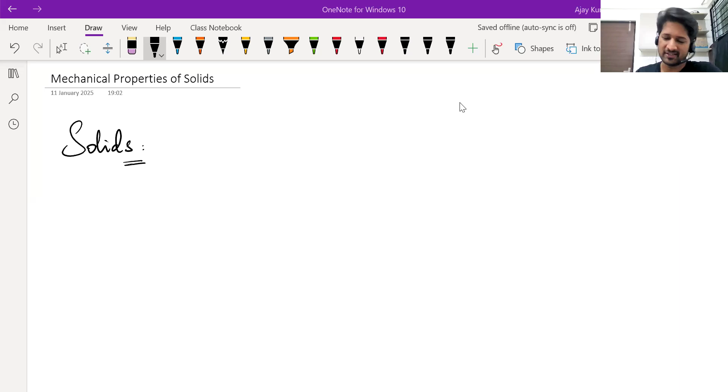So they have a fixed shape. Okay. Solids have a definite shape and size. Okay. Liquids and gases together are called fluids. They don't have a definite shape. They tend to take the shape of the container. Okay.

Now, the shape of a solid, is it not possible to change it at all? Is it possible to change the shape of a solid or not? Yes, sir. It is possible. Okay. All three of you come up with some examples where something is done to a solid to change its shape. I'll give you all 1 minute. Think carefully. You should describe a situation where some process changes the shape of a solid. Okay, I'll give you 1 minute.

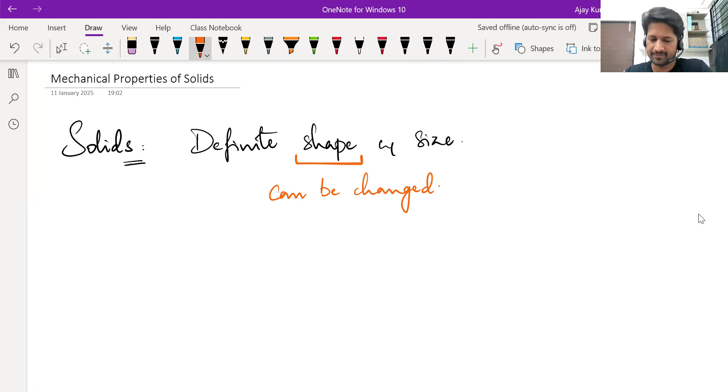Right. Rishi, describe one situation where some process changes the shape of a solid. Sir, plastic bottle or any normal bottle being crushed. Okay, crushing a water bottle. Fine, good. Vanilla? So a spring being compressed. Good, good. Aishwarya?

So sublimation of camphor. There, see, sublimation is a process where solid converts to gas or vapor. Okay, so it doesn't stay as a solid. Can you think of any other example? Object must stay as a solid, but its shape should change.

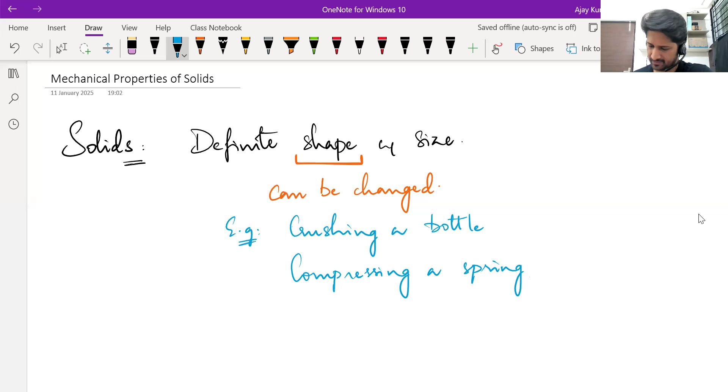So when you change the shape of clay, so clay dough. Okay, fine, fine. So, fine. We'll just take that as an example. Right, right. So it is possible to change the shape of a solid. Actually, wet clay or play dough, you can't call it solid. It's something called semi-solid. Okay, but yeah, that's fine. Maybe expanding a rubber band, stretching a rubber band. Okay.

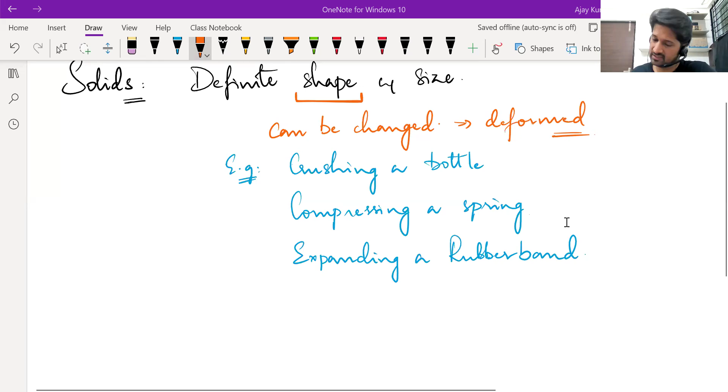So tell me, in order to change the shape of a solid, changing shape means what? Deforming. In order to deform a solid, what is necessary? Like in all these cases, what should you apply on the object to cause these changes? We should apply a force. Force is necessary, correct? So to deform a solid, force must be applied. Otherwise, the solid will maintain its shape. Okay, such materials are called solids. Okay.

Now imagine driving a nail into a wall, or hitting a nail into a wall. You all must have seen the process, no? The person holds the nail against the wall with one hand, in the other hand they have a hammer or a stone, and they strike it. And most probably the nail will cause some damage to the wall. Even if it doesn't penetrate completely in one strike, it will definitely leave a small dent, a small hole on the wall.

Now, without the nail and the hammer, if you punch the wall with the same force, will you be able to create that hole which the nail did? No, sir. Most probably not. Okay. So if you simply hit a wall with your bare hand, you won't be able to create a hole in the wall. But the same force, if you apply through a hammer on the nail, the nail is able to create a hole in the wall.

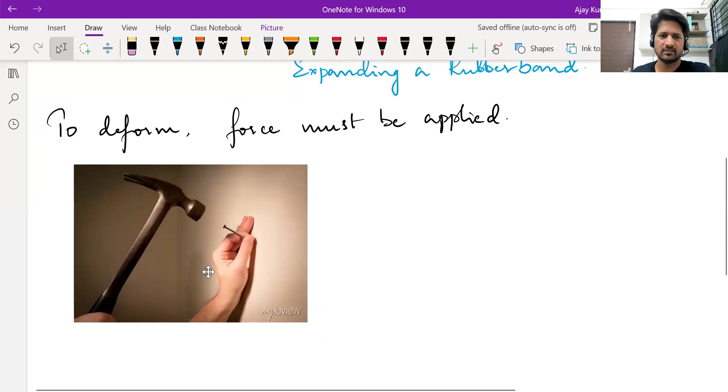What is the difference between striking the wall directly with your hand and placing a nail against it and then striking? In both cases, the force you are applying is the same. In one case, you are doing it through a hammer and nail. In another case, you are doing it directly with your hand. What's the difference? Sir, the amount of force at one single point. Okay, force at one single point.

Good, good. Properly speaking, it is the force that you apply per unit area that is different. If you punch the wall with your fist, the force will be distributed over whatever area of the wall your fist touches. But when you hit a nail with the same force, the nail's tip is very narrow. So the force gets transmitted to the wall over that small area, and that is able to deform the wall.

Okay, see, when you directly punch it also, at the molecular or atomic level, some disturbance will be there, but you won't be able to notice it. But when you hit the wall through the nail, you will be able to notice a deformation or a damage caused. It causes more damage. Fine. So to deform a solid, a force must be applied.

But the deformation that actually happens does not depend only on the force. Deformation depends on force per unit area, how much force is acting per unit area. You must have come across many examples of this. Like, when you simply stand on the floor, your feet won't hurt. But when you stand on something sharp, or when you accidentally step on a nail or a thorn, it will hurt. In both cases, it is your weight only.

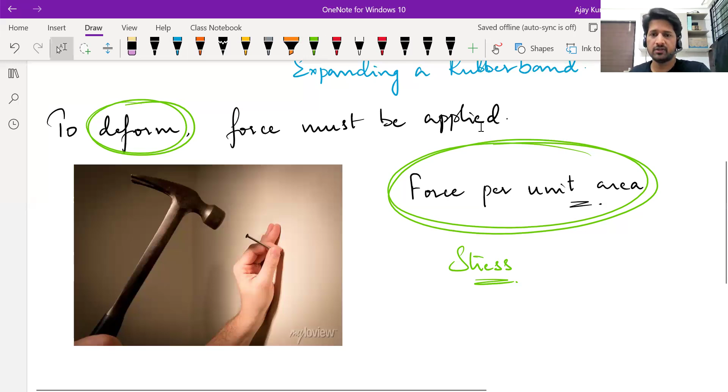So stress by definition is force per unit area. Now based on how you apply the force, there are different kinds of stress. We'll discuss those. But first of all, derive the SI unit and dimensional formula of stress, all of you. I'll give you 2 minutes. Yeah, Pawan, what is the SI unit of stress? Newton meter inverse square, sir. Force per unit area. Force is in newtons, area is in meter square. So newton per meter square.

Fine. Dimensional formula: newton is MLT^-2, divided by meter square, L^2. So M L^-1 T^-2. Newton per meter square is sometimes also written as pascal, but pascal is more commonly used for pressure. Stress and pressure are quite similar; there is a slight difference between them. Pressure is one particular case of stress actually. So pascal is more commonly used for pressure, but technically it's the same as newton per meter square. So stress can also be expressed in pascals.

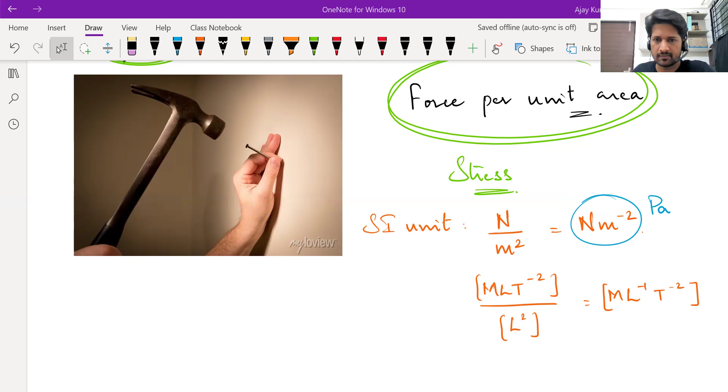So as I said, depending on the kind of stress you apply, there are different kinds of deformation you can produce in the object. These are the cases that you need to learn. In the first case, case A, a force is applied at the ends of a cylindrical wire, or a cylinder itself. When you apply a stretching force at the ends of a cylindrical wire, the length will elongate, increase a little bit.

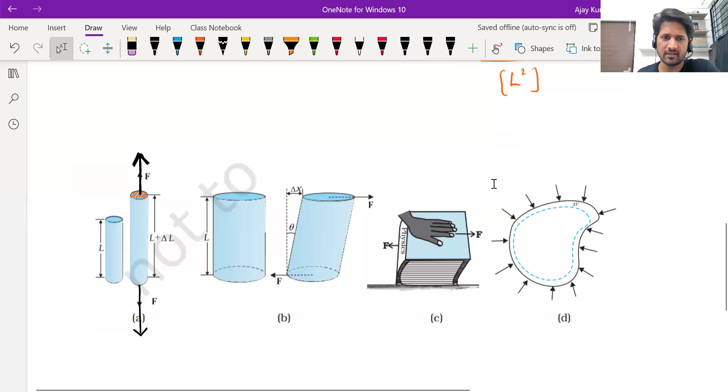So applying a force that way, which way? The force is applied perpendicular to the area of cross section. Applying a force that way creates one kind of stress on that object, and based on the stress there is a kind of deformation it produces. Here the cylinder is getting elongated, length is increasing. Of course, when length increases, the cross sectional area will decrease a little bit, but for small elongations that change can be ignored. We'll discuss all that while solving problems. Next case is also a proper cylinder with a wide area of cross section, and they are applying a force parallel to the area of cross section.

Okay, and it is producing a different kind of deformation, as you can see. Second case and third case are similar. In the third case also, what they are doing is on a fat textbook, they are applying a force parallel to the cover of the book this way, and it causes certain deformation.

Okay, what do you call this? What is this part of a book called? The part where all the pages are stuck. Find out. Okay, so basically that is getting deformed.

So B and C are like one case where force is being applied parallel to the area of cross section, and it causes a particular kind of deformation. Then the last case, if you see, forces are being applied at every point on the surface of an object, and they are being applied perpendicular to the surface. Okay, in that case, what happens?

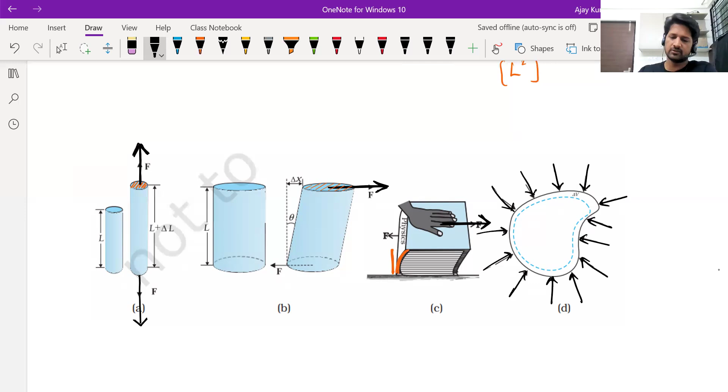So, the first case where the force is applied perpendicular to the area of cross section results in elongation of that cylinder. If the force was applied inwards, it would have resulted in a compression of the cylinder. So this kind of stress is called longitudinal stress.

The stress which tends to elongate or compress an object is called longitudinal stress. And to do that, to elongate or compress an object, you need to apply a force perpendicular to the area of cross section. Next case, B and C, we apply force parallel to the area of cross section.

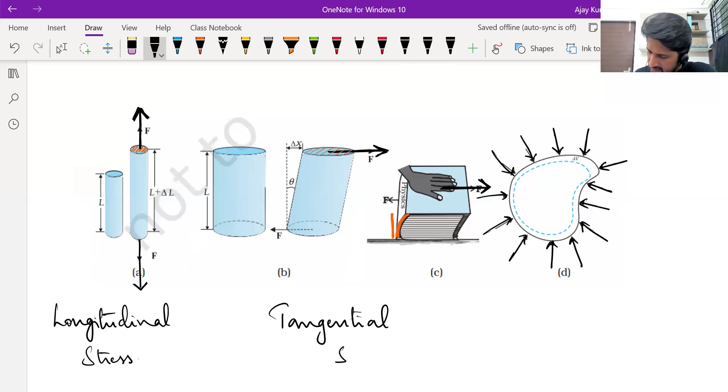That kind of stress is called tangential stress - tangential force, tangential stress. Third case, where forces act at every point on the surface and they tend to compress the object, or they can even expand the object - in that case, the stress is called bulk stress or volumetric stress.

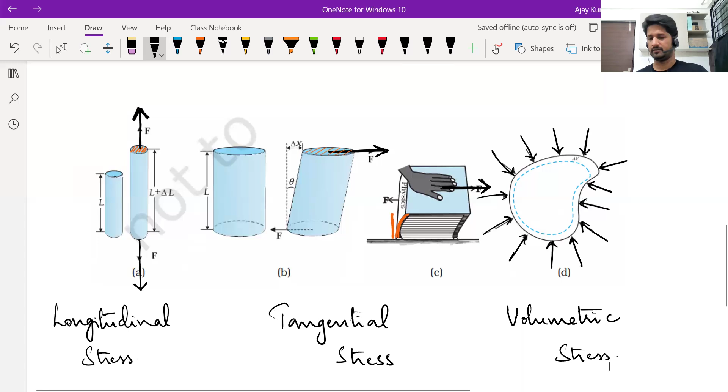Now you all think of some solid materials. There are a lot of materials which you can call solids. Each one of you come up with some examples. Think of one solid material which is very hard to deform, and think of one solid material which is very easy to deform. Okay, I want answers from all of you. Type in chat, I'll give you 2 minutes. One material which is considered a solid and is very hard to deform, one material which is considered a solid and is relatively easier to deform. Each one of you give examples for this.

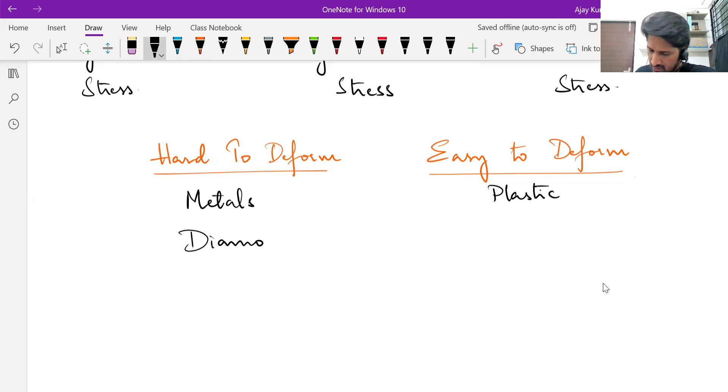Okay, for examples of solids which are hard to deform, I got one answer as metals as opposed to plastic - metal bottle, plastic bottle. Then I got two answers as diamond. Good, diamond is the hardest material known to us. And on the other side - rubber, paper, sponge, steel. Fine, steel comes under metals. Good, so there are some materials which are easy to deform and there are some materials which are hard to deform.

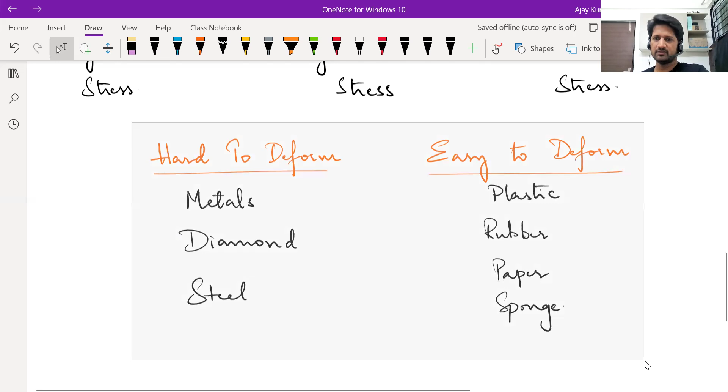Basically, what happens is when you apply a deforming stress or a deforming force, due to intermolecular forces - intermolecular forces can be attractive, they can be repulsive also - if you want to discuss in depth, you must have heard of something called bond length, in chemistry, chemical bonding.

So that's the mean distance between two atoms in a bond. If atoms come closer than that distance, the force between them becomes repulsive - it will send them away. And if atoms go slightly farther than that distance, the force brings them together. The same thing happens with intermolecular forces also.

So suppose there is a solid object and you try to compress it - for example, this pen itself. If I try to compress it this way, the force I am applying is inwards, but the pen does not compress, there's no visible compression. I'm not able to notice any compression here. So basically what happens, the moment we apply a force, internal forces between the molecules will start opposing - those forces are called restoring forces. They restore the shape of the solid, or they maintain the shape of the solid.

These are very important. Now, if you try to compress an object - compression means you will be applying a force inwards - then the restoring forces will be outwards. If you try to elongate an object, if I try to stretch this pen, I'm not able to notice any visible stretch in it. Maybe if you stretch a rubber band, yes, the stretching will be visible.

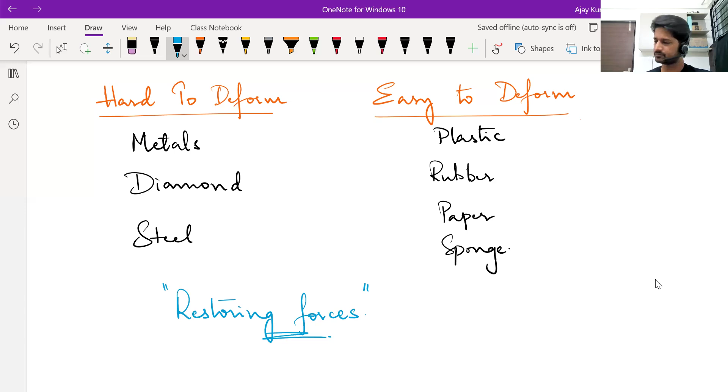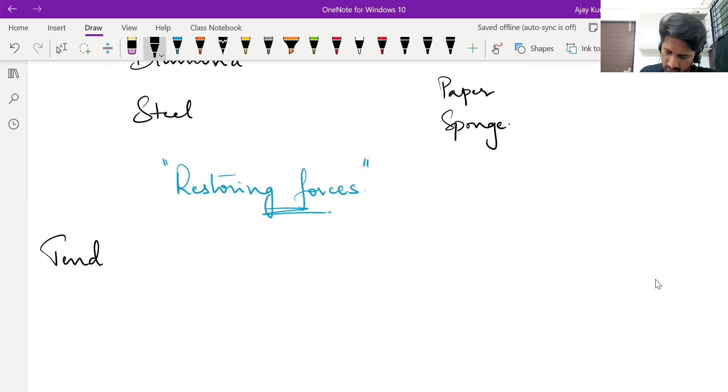Now tell me, the tendency of a material to maintain its shape, or to oppose a deforming force, what is it called? Sir, elasticity. Correct, elasticity is the tendency of a material to oppose a change in shape. We had discussed this earlier in types of collisions, work, energy and power.

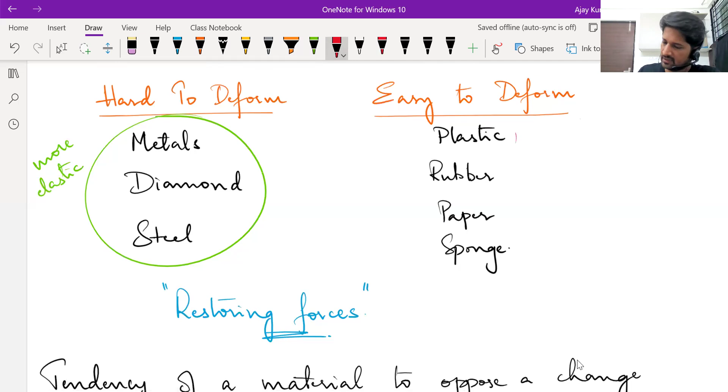We even discussed whether steel is more elastic or rubber is more elastic. Materials which are harder to deform are more elastic, they have a greater tendency to maintain their original shape. Materials that are easier to deform are less elastic.

The opposite of elasticity is plasticity. Some materials have no tendency to regain their original shape at all after deformation, and you can very easily deform them. Such materials are called plastic. I'm not talking about the substance called plastic in daily life, but about this property of materials. If materials are very easy to deform, they are said to be plastic. So elastic is the opposite of plastic.

Based on the kind of stress you apply, a certain kind of deformation is produced. Deformation is measured in terms of strain, or you can say strain is a measure of the deformation produced in the object. There are different kinds of stresses and different kinds of deformations, so there are different kinds of strains as well. For each kind of stress, there is a corresponding kind of strain.

How is strain calculated? Stress is force per unit area. Strain is basically the relative change in dimensions of the object. When we discuss the formula, you'll understand better. So strain is a relative change in shape—how much has it deformed compared to the original shape. That is what strain is.

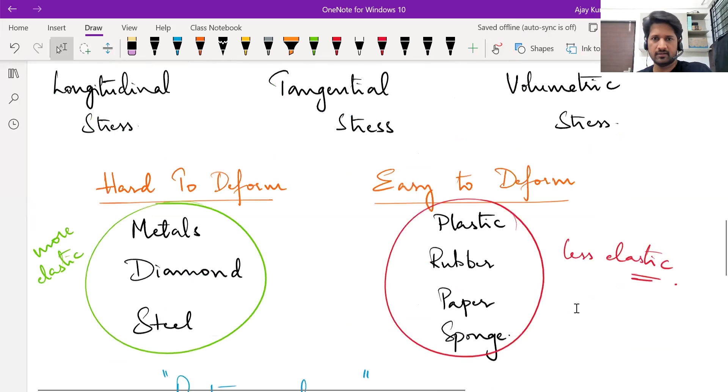Now, greater the stress you apply, greater the strain that gets produced. From everyday experience, we can tell this—greater the deforming stress, greater the strain you can produce. So up to a certain extent, for materials, the strain produced will be proportional to stress. It's not always directly proportional, but up to a certain extent there will be a proportionality.

So let us assume the strain produced is directly proportional to the stress applied. This is not always true—there are a lot of cases where the proportionality will not hold. But for now, we will consider only this case where strain is proportional to stress. If that happens, how to calculate strain in different cases is what we'll learn. So assume strain is proportional to stress—strain means deformation, stress is the deforming force.

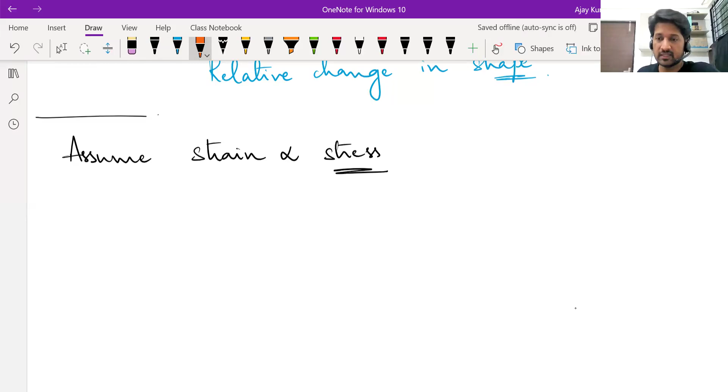The proportionality constant between stress and the corresponding kind of strain is called modulus of elasticity. Now there are different kinds of stresses and different kinds of strains, different types of deformation that you can produce. For each kind of stress-strain pair, there is a modulus of elasticity defined.

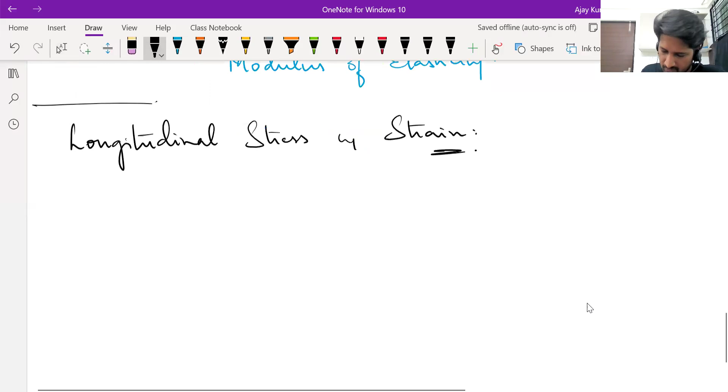Let us first discuss longitudinal stress and longitudinal strain in detail. We already discussed that longitudinal stress is the perpendicular force applied per unit area—you call it longitudinal stress when force is applied perpendicular to the area of cross section. So how do you calculate longitudinal stress? It's the perpendicular force acting per unit area on a cross section. You will be given which cross section to calculate the stress on. You see the forces acting on that cross sectional area, identify which forces act perpendicular to it, and divide force by area to get the longitudinal stress.

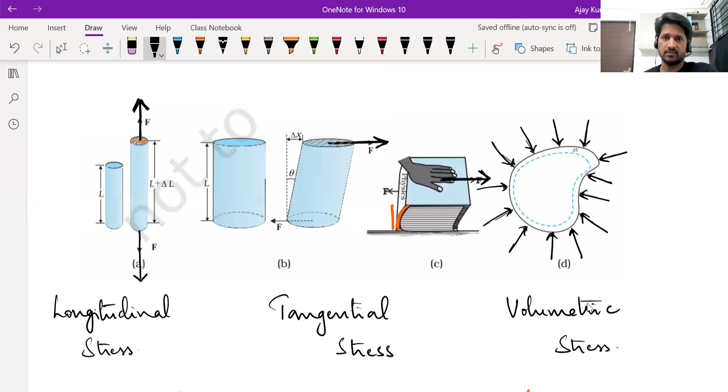When you apply longitudinal stress, what happens to the object? The object will either get elongated or compressed—the length will change. If it gets elongated, you are applying a stretching force, creating tension. So in longitudinal stress, there are two types: if you are trying to stretch the object, it is called tensile stress; if you are trying to compress the object, it's called compressive stress.

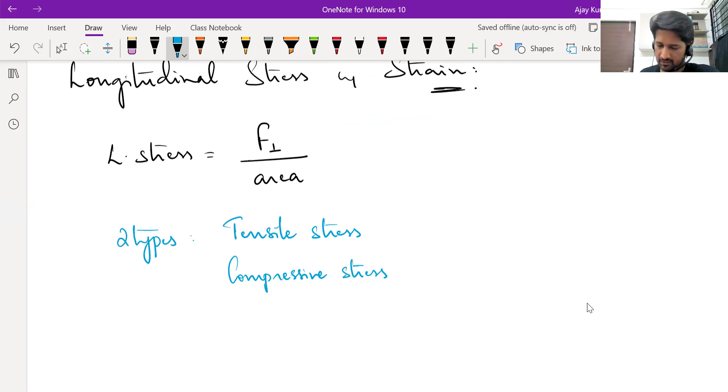Both are examples of longitudinal stress itself. And in both cases, what will happen? The length changes. In one case, the length increases, in another case, the length decreases. So that's longitudinal strain.

As I said, strain is a measure of deformation, the relative change in shape. Longitudinal strain is calculated as change in length divided by the natural length, which we call L naught. Natural length means whatever is the length of the material before the stress is applied, that is, when there is no stress.

Longitudinal stress is the perpendicular force acting per unit area of cross section, and the corresponding strain produced is calculated as delta L by L naught, change in length divided by the original length. Change in length is in meters, SI unit, and original length is also in meters, SI unit, so change in length by original length will not have any units or dimensions.

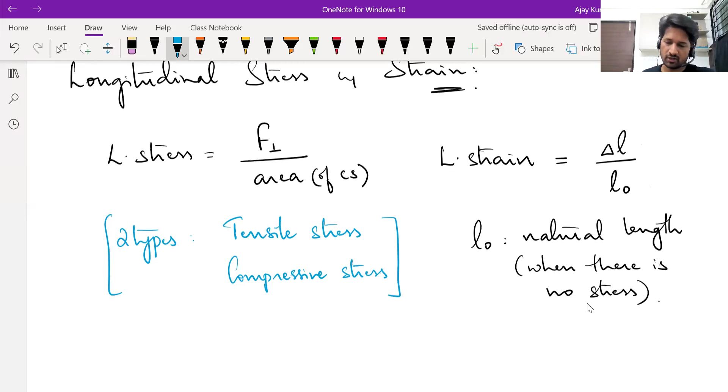Not just longitudinal strain, any kind of strain, since it's just a relative change, is dimensionless. As a physical quantity, it has no units, no dimensions. Okay, let's solve problems based on this.

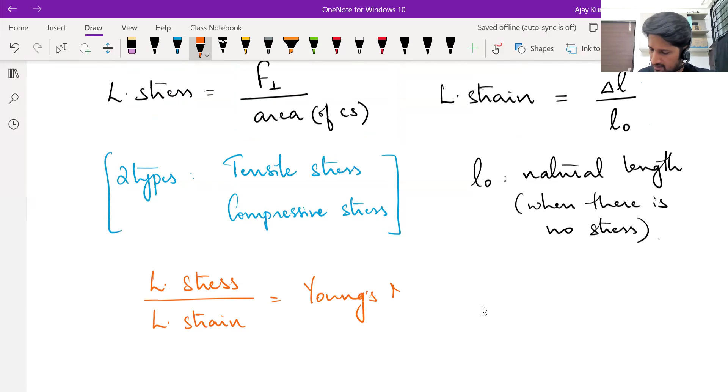We just discussed that strain will be proportional to stress up to a certain extent. The proportionality constant between longitudinal stress and longitudinal strain is called Young's modulus of that material. Young is the name of a scientist, and this proportionality constant is named after him. It varies from material to material.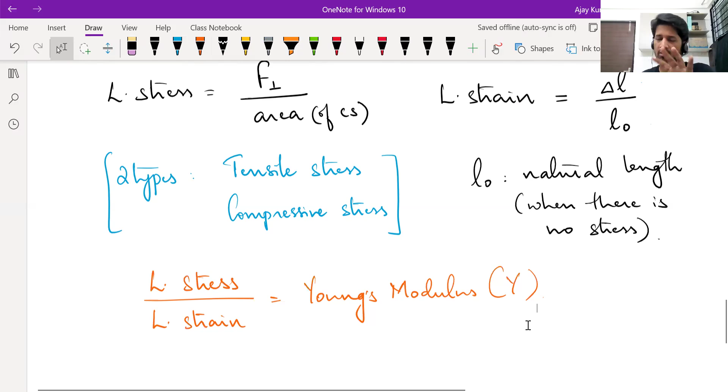Not all materials have the same Young's modulus. Some materials are easy to deform, some are hard to deform. So for the same stress that you apply, the strain produced will vary from material to material, and even in the same material, from object to object. For example, applying a stretching force on a single rubber band versus a bundle of rubber bands produces different amounts of elongation.

So Young's modulus is not the same for all materials, but for a particular material, it will be the same. We'll solve problems, and you'll understand.

Now, stress has unit Newton per meter square. Strain does not have any unit. Therefore, Young's modulus in SI units will also be Newton per meter square itself. Whatever is the unit of stress, the same will be the unit of modulus of elasticity.

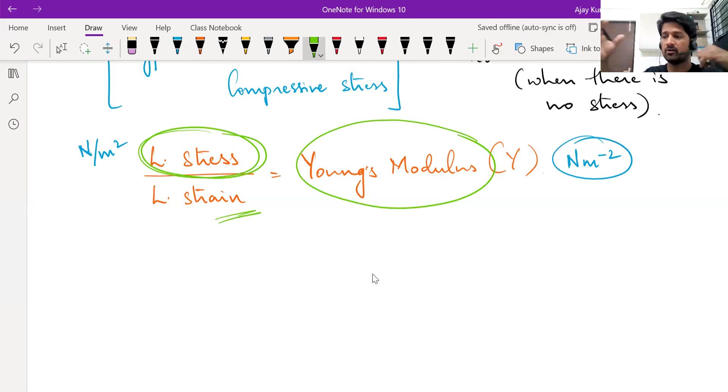I am stressing on units because questions based on units and dimensions from this chapter are very common. So if you know the Young's modulus of a material and how much stress is applied on it, you can tell how much strain gets produced, meaning by what extent it will elongate or get compressed. Or if you know any two of these terms, you can find the third one.

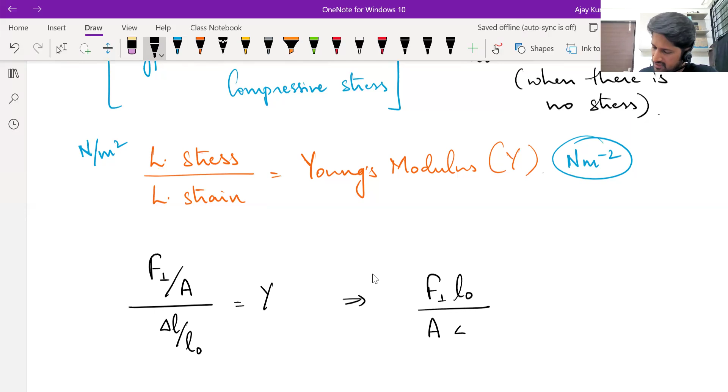Now, longitudinal stress is perpendicular force per unit area, and longitudinal strain is change in length divided by natural length, and stress divided by strain should be equal to Young's modulus. So perpendicular force multiplied with natural length, divided by area of cross section multiplied with change in length, becomes Young's modulus. Just remember it as stress by strain.

Usually we'll be interested in deriving the elongation. From this formula, you can say elongation delta L is equal to F perpendicular times L naught, divided by A times Y. For convenience, we write it as FL by AY. We'll apply this formula, and most of this chapter is based on longitudinal stress itself. Note down these formulas, all of you.

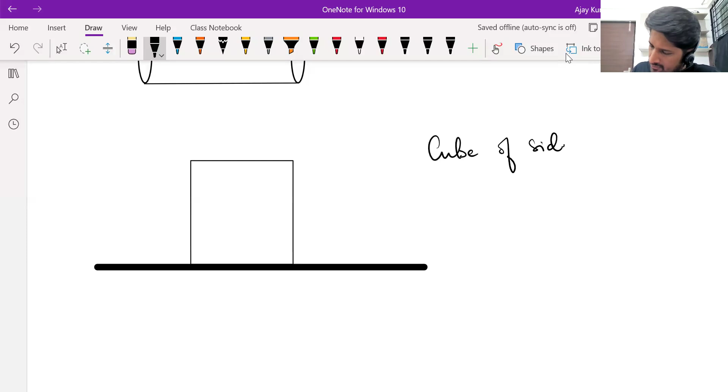Consider a cube of side A and total mass m placed on a horizontal surface. It's in equilibrium.

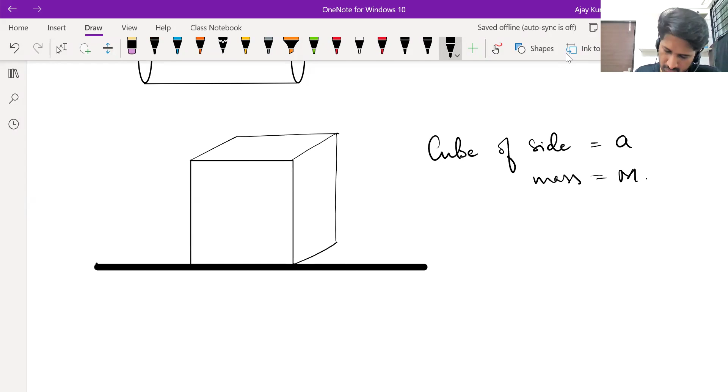Calculate the longitudinal stress. First case, on its base. Next, on its cross section, which is at a height of A by 2 above the base.

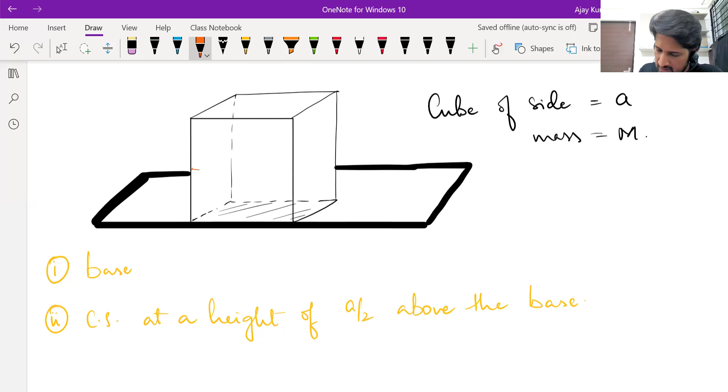It's important to visualize the cross sections first. The base is this. So you have to find out how much longitudinal stress acts on the base, and then the other cross section I am referring to is this, which is at a height of A by 2 above the base.

Longitudinal stress, by definition, is perpendicular force per unit area. Think about what force acts perpendicular to that area of cross section, how much it is, then divide force by area to get the stress. Do this, all of you: derive the longitudinal stress on the base and on the cross section which is at a height of A by 2 above the base.

Let's discuss. Rishi, tell me first, if you want to find out stress on the base, what forces act on the base of the cube? So mg and normal. Mg, does it act on the base of the cube? Why are the other particles of the cube weightless? Mg acts everywhere, okay? Fine.

Now, if only gravity had acted on it, had it been in free fall, it would not have gotten deformed. But because of the normal force acting on the base from outside, there is deformation. So the force acting on the base, which causes stress on it, is the normal force. Fine. Like you can experience this in real life also.

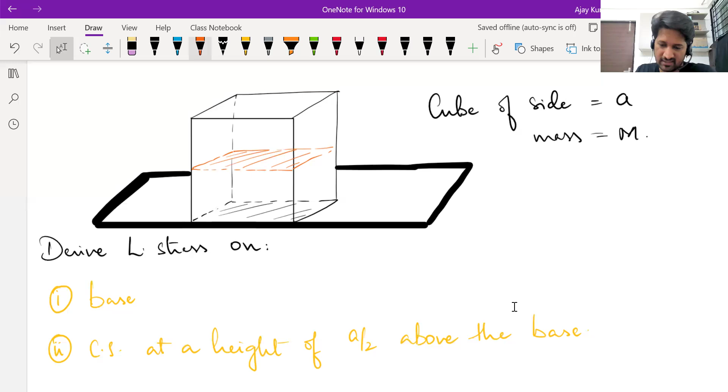Like suppose your hand is free like this, there is no stress on it. But when you push it against a wall, there will be stress on it. So it's the normal force which causes stress. And normal force acts everywhere on the base, it acts over that entire area.

Okay, Rishi, how much is the area of the base? Area of the base of a cube. A square, it's a square. Okay. And how much is the normal force that acts on it? The force acting perpendicular to the base, how much is it?

You said M, weight, sir. Can you repeat? M is mass. How can mass be a force? Mg. Okay, in this case, the block is in equilibrium, so normal force balances the weight of the block. So perpendicular force acting is mg, area is a square. So the longitudinal stress on the base will be mg by a square.

Next, Pawan. We are considering another cross section which exactly divides the cube into two halves, two equal halves. It is at a height of a by 2 from the base. Pawan, can you tell me how much stress acts on that? Not stress, how much perpendicular force acts on this cross section? Perpendicular force means normal force. How much normal force acts on that cross section?

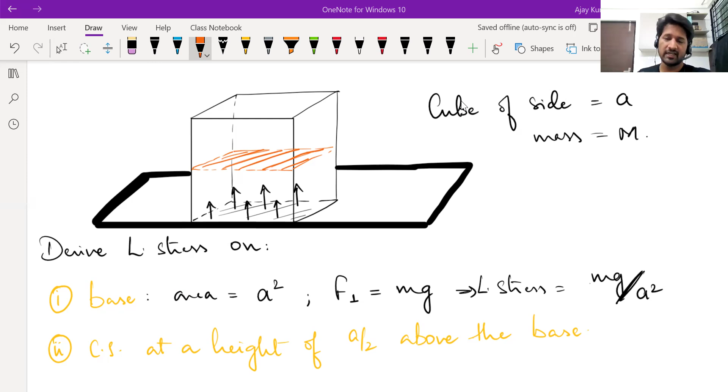Sir, mg by 2. Mg by 2, correct. The normal force at that level balances the weight which is above it. And since that cross section cuts the cube into two equal halves, the weight above it is mg by 2, so the normal force at that level will be mg by 2. And it's acting on the same area, no? It's a cube. When you cut it horizontally, the area you get will still be a square of area A square. So the stress at that level becomes force mg by 2 divided by area A square, so mg by 2A square.

Fine, hope this is clear to all of you. If you have any questions, you can ask. Next.

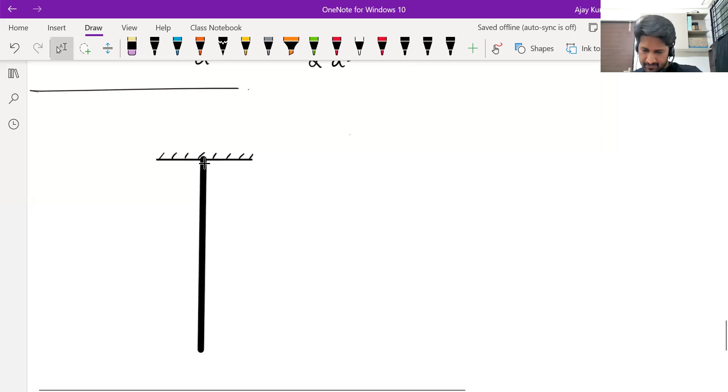Suppose there is a wire suspended from a ceiling roof. It's a heavy wire, not a massless string. Think of it as a thick and heavy metal wire. Assume its mass, total mass is capital M. Cross-sectional area, CSA stands for cross-sectional area, let's say it is A. And total length is L.

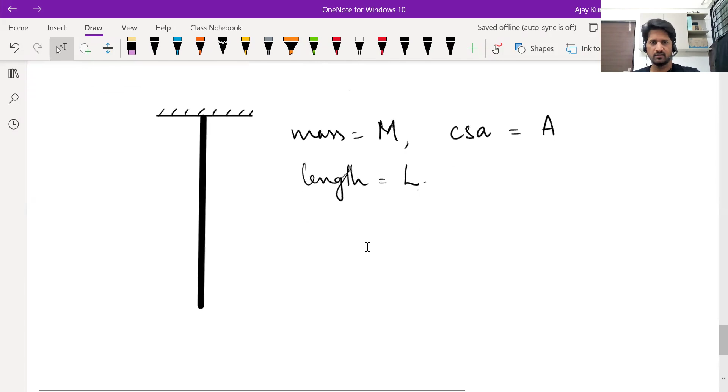Fine, do you think there will be stress in this wire or not? Like imagine yourself doing pull-ups, okay, or holding a bar and hanging from it. You all must have tried it in parks, play areas, or in gyms. Do you feel stress on your body when you stretch yourself like that or not? Or when you hang holding a bar, will you feel stress or not?

Yes, sir. Okay, where do you feel the most stress? Suppose you are holding a pull-up bar, okay, and you suspend yourself from it. Where do you feel the most stress? Arms, obviously, on your palm itself the stress will be highest. And I don't know if you actually checked it or not, but as you go lower, the stress decreases. And on your feet, there won't be any stress in that case.

When you are simply standing on the ground, on your feet, the stress will be the highest. Like in the case of this cube, the stress on the base was mg by A square, but at this level, the stress was only mg by 2A square. Same happens with our body also. When you are simply standing on the ground, maximum stress will be on your feet and the bones in your legs. Higher up or on the upper parts of your body, there will be lesser stress. But when you hang yourself or suspend yourself from a pull-up bar, then the stress will be more on the upper parts of your body than the lower parts.

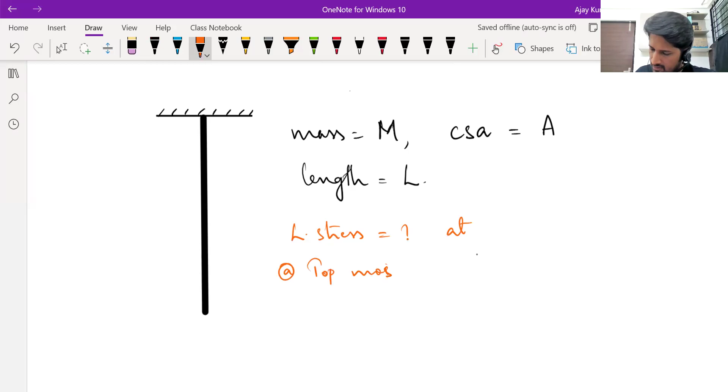Now, the same thing should be happening with this wire as well. So I want you all to find out how much is the stress. Okay, calculate longitudinal stress at A, the topmost point. Now, I call it the topmost point, but actually there is a small cross section there. When we say topmost point, we are referring to that small area of cross section.

Calculate the longitudinal stress there and calculate longitudinal stress at the midpoint of the wire. When we say midpoint, we mean the cross section which is exactly at half of the wire. And then the bottommost point of the wire. Try this, all of you.

Total mass of the wire is given M. Total length is given L. And you are given three different positions where you are required to find out the stress. Okay, I'll give you all 2 minutes. Type answers to all three parts together.

Okay, first of all, tell me which force causes stress in this case? To calculate stress, you need the magnitude of a force acting perpendicular to an area of cross section. Now, cross sectional area of the wire is easy to visualize. The wire can be thought of as a cylinder. It could have been any shape actually, but you can take it as a cylinder. Then the cross section will be in the form of a circle like this.

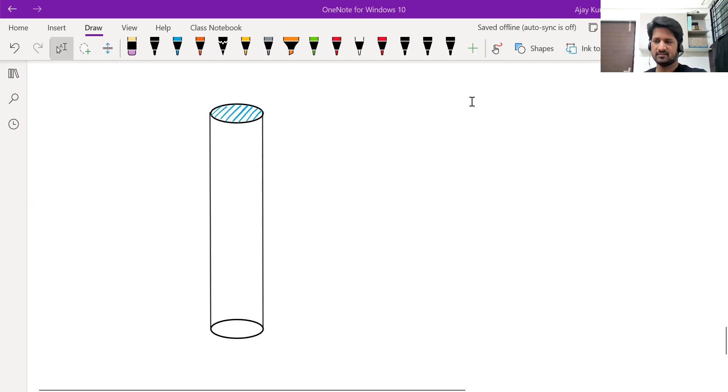So at the topmost point where it is attached to the ceiling, this is the area of cross section. But what is the force acting on it? Name of the force. Does this wire have a tendency to get stretched or compressed? It's stretched. And you can stretch an object by applying tension on it. So the force that you need to consider is the tension, which acts everywhere on the area of cross section. So where the wire is attached to the ceiling, there will be a tension acting on that cross section.

Now the area of cross section is given to you as A. At the topmost point, how much is the tension is what you need to know. If you know that, then that tension divided by area of cross section gives you the stress. Vanilla, you have given one answer, mg by A. Why do you say tension there is mg? How can you say that the tension there is mg? On what basis?

So the mass below the topmost point is m. Fine, good. See, the tension there has to support the entire weight of the wire, has to prevent the wire from falling down, right? So tension there has to balance mg. Therefore, the longitudinal stress at that topmost point, tension divided by area, simply becomes mg by A.

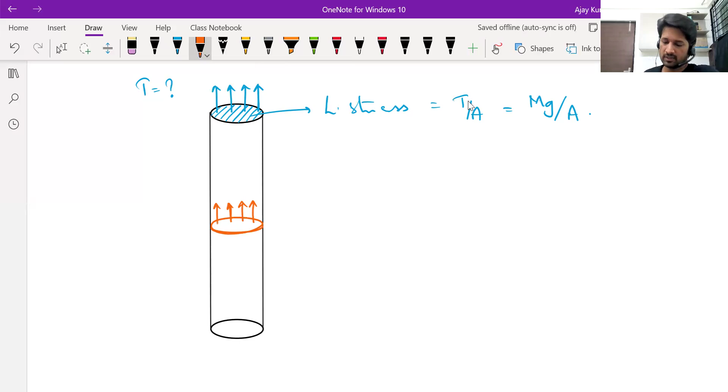Next, you are asked to calculate stress at the midpoint of the wire. Imagine the cross section at the midpoint. Basically, this wire is suspended under gravity. So what will happen? The lower part of the wire will be supported by the upper part this way. The upper part will exert a force on the lower part like this. The lower part will also be pulling the upper part down. There will be force acting like this also on that cross section. You have to take force only on one side, not both sides.

For example, if you consider this pen, I'm sure you all are able to see a red band here. So you can think of it as a cross section. There is some part of the pen to the right side of the cross section, some part to the left side. Now, if I try to stretch it like this, the pen is not separating here. Means the left side part is pulling the right side part. So on the right side part, there is tension acting this way. For me, this is the right side part.

There's tension acting this way. The right side part is also pulling the left side part. So on the left side part, the tension acts this way. So both of them have this cross section in common. That red band is common to the right side and the left side part. So when I stretch it like this, there will be forces acting on both sides. You have to take force acting to any one side only. You should not take both the forces.

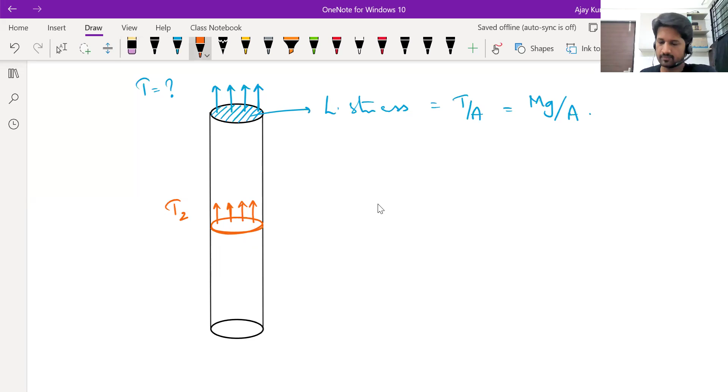Right? So if you consider the lower half of the string, the upper half will be supporting the lower half by preventing it from falling down. So you can think of it like this. Let's say the tension here is T dash, or let's take it as T2. Fine. Now the tension at the midpoint only has to support this much weight, which is half the total weight. Therefore, the tension at the midpoint will be mg by 2.

And then the stress, longitudinal stress on this cross section will be mg by 2 divided by A. You can write it as mg by 2A. The area of cross section is given to be the same everywhere.

Okay. Next, the lower end of the wire. Any answer, anyone? How much will be the stress on the lower end of the wire, which is simply hanging freely? There's no weight below it. How much stress will be there on it? Zero, correct. There's no stress on it. Fine. Tension there becomes 0. Okay.

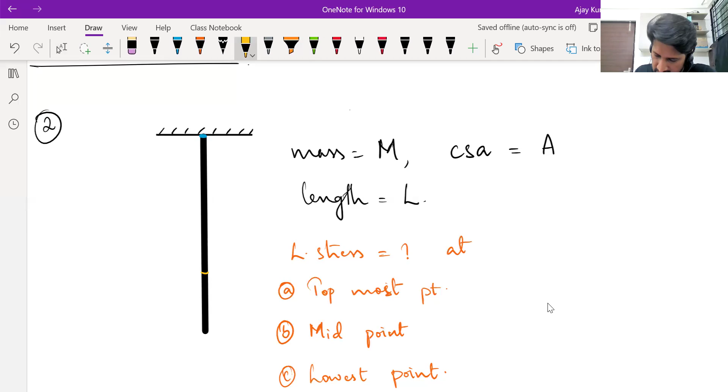Now try another question. Based on the same situation, I want you all to derive longitudinal stress. See, if you can derive tension, you can derive the stress. Fine. So derive tension and from that derive stress at a random cross section now, which is at a distance x from the lower end. From the free end of the wire, the point is at a distance x. I want you to find out how much is the stress at that level.

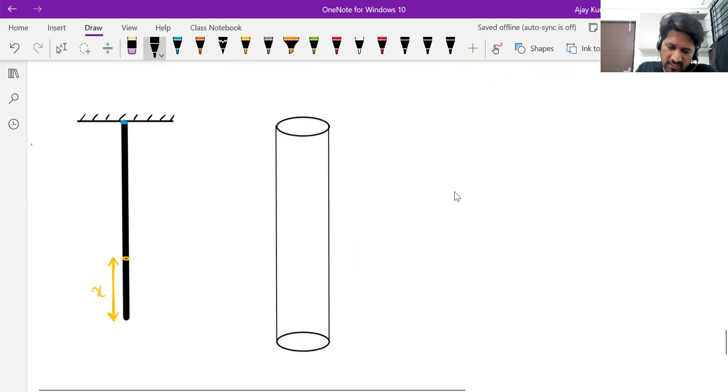Try this, all of you. I'll give you all 2 minutes. I'll show you the diagram here. You can visualize the cross section also. Those of you who are able to visualize it can start solving. Total mass is given m, total length is L, cross-sectional area is given as capital A. Okay. Answer should be in terms of those. Of course, it will depend on x also.

So you are asked to derive the longitudinal stress at a cross-section which is at a height x from the lower end or the free end. So you know the steps. You need to first derive the tension there. Based on that, you can express stress. Try. Vanilla, your answer is correct only.

Now see, we know that this wire has a tendency to get stretched. Okay, so you have to find out the tension at that level. Now, if you consider the lower part of the wire, its weight is pulling it down, and the tension at this level is preventing it from falling down. So the tension there, we'll call it T naught, should be equal to the weight of the wire which is present below it. Okay, the entire wire is in equilibrium. So that lower part of the wire is also in equilibrium. Tension should be balancing its weight.

Okay. So you need to derive an expression for weight of the wire which is below that cross section. For that you need mass. Fine. Now you can think of this wire as a volumetric mass distribution. You can think of it as a linear mass distribution also. We'll do it both ways. Now, why are we bothered about mass distribution? Because you now have to derive an expression for some part of the system's mass. And we had done this many times, starting from center of mass.

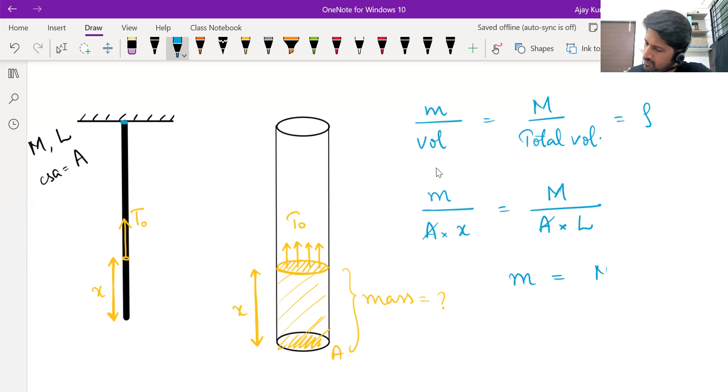See, the area of cross section is A. The length is X. So the volume of the part whose mass you are trying to derive will be A into X, area of cross section multiplied with the length. Basic volume formula should be equal to total mass by total volume. Total volume is the same area of cross section multiplied with the total length. That's all. Area of cross section gets cancelled. You get small mass, the mass that is hanging below that point, equal to capital MX divided by L.

Okay, Vanilla, your answer is also slightly wrong. Your answer would have been correct had I given X on the upper side, but I have given X on the lower side. Anyway, this is the mass hanging below the given cross section. Had you thought of this as a linear mass distribution, then your equation would have been like this. Small mass by small length is total mass by total length, which is the same answer that you get. Small m is equal to capital MX by L. Even by taking it as a volumetric distribution, you get the same expression.

So you know the mass which is hanging below that cross section, and now it's very easy. The tension on that cross section is balancing the weight of the part which is hanging below. So if this is the mass that is hanging below, then the weight hanging below, which is equal to tension, should be small m into g. That is capital Mgx divided by L. Now divide that by area, you will get the stress. Therefore, longitudinal stress at that level is tension Mgx by L divided by area. So it becomes Mgx by LA.

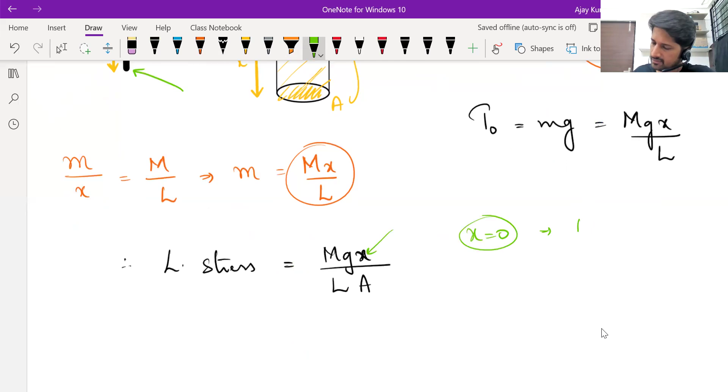Now let's verify this answer. If you put x as 0, that means we'll be referring to the lower end of the wire. If you put x as 0, stress becomes 0. Makes sense? If you put x as L by 2, half of the length, you'll get Mg by 2A, which is what we derived in the last problem. So this expression can help you tell the stress anywhere in the wire. Okay.

Now, what happens when you apply longitudinal stress? You get longitudinal strain, either elongation or compression. Now, we had written one expression here. Most books don't tell you this, but problems will be based on this. The ratio of longitudinal stress to longitudinal strain is called Young's modulus. Then you can rearrange this equation and get this formula. Elongation delta L is equal to FL by AY.

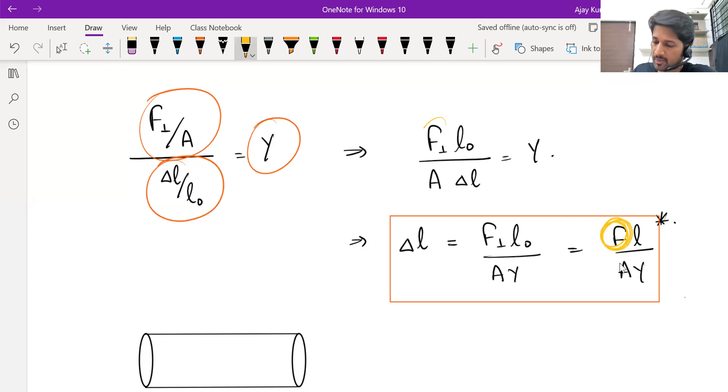Now, why I put a star here is the F by A that you see in this expression. See, F is actually perpendicular force. A is the area of cross section. The F by A that you see in this expression should be same over the entire length L. Then you can use this expression to derive the total elongation. That means this formula delta L is equal to FL by AY.

Delta L is the elongation. F is the force which is producing the elongation. L is the original length or the natural length. A is area of cross section. Y is Young's modulus. If you want to use this formula, F by A must be same everywhere. Means it must be uniform. That means the wire or the object must be under uniform stress. Then only this formula can help you find out the elongation.

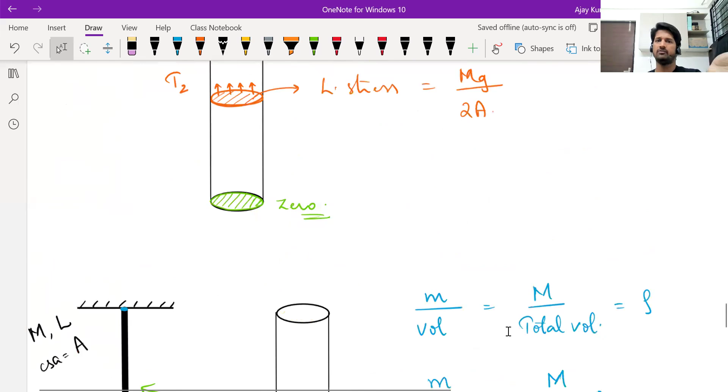What if the stress is not uniform, like the case that we just discussed, or this cube case? Cube has different stress at different levels. The hanging wire also has different stress at different levels. Mostly stress will be non-uniform only. Uniform cases are special cases actually. So what to do in case the stress is not same everywhere? In case F by A changes from point to point, what to do?

Then you'll have to go element by element, like the string case that we just took. We know that stress varies based on the distance. So if you consider a small part of this string, like the one I'm highlighting now, maybe from here to here, on that small part, you can assume the stress is same everywhere. Then you can use that formula delta L is equal to FL by AY. In that small part, you will get a small elongation.

Once you know the elongation of one small part, you integrate the elongations of all small parts, you get the total elongation of the wire. Okay. So if you want to find out how much an object stretches when you apply a longitudinal stress on it, this is what you need to keep in mind.

First, see if the force that you are applying produces a uniform stress throughout or non-uniform stress. It is quite likely that the stress will be non-uniform. Depending on how it is applied, it may be uniform also. If it's uniform, directly use the formula delta L is equal to FL by AY, you can get the elongation. If it's non-uniform, you'll have to consider the object element by element. We'll solve problems of all kinds.

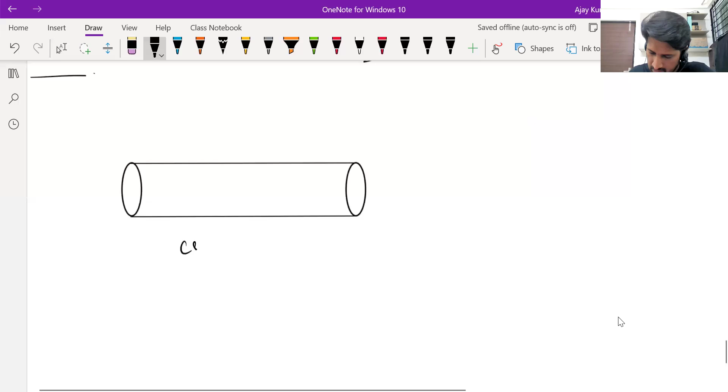Consider this situation, all of you. Suppose there is a cylinder. The area of cross section is uniform. Let's consider cross sectional area as capital A. Let's say it is pulled on one side with a force F like this, and on the other side also with a force F outwards. Now these are external forces. When you apply forces like this, one of you tell me what happens to the cylinder?

Sir, it elongates. It elongates. Will it elongate forever? Or will it elongate up to a certain extent and stop? Up to a certain extent. Up to a certain extent, it will elongate and stop. Now why does it stop elongating? Because the restoring forces will balance the deforming forces. The forces we are applying are called deforming forces. The forces developed within the body which help it maintain its shape are called restoring forces. So restoring forces should be balancing the deforming forces.

Let's say that has happened. So the wire has elongated a little bit and it has stopped elongating. Now you are applying the same force on both ends in opposite directions. Then the net force on this wire or cylinder is zero. On the entire system, if the net force is zero, even on small parts of the system, the net force will be zero. Now, this wire has a tendency to get stretched. We are trying to elongate this wire; we are applying a tensile stress.

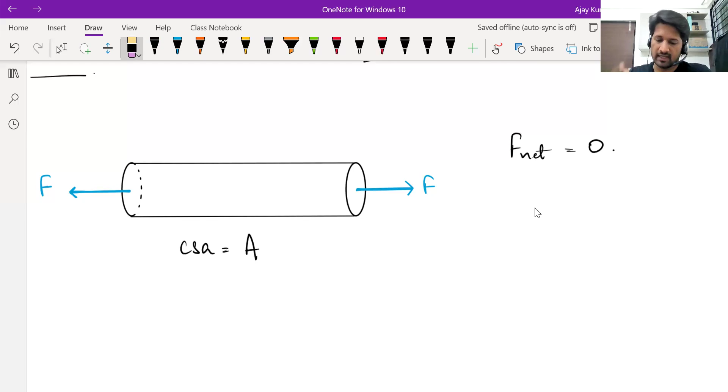So tension develops everywhere. On every cross section that you can visualize, there will be a tension acting. Like you take a cross section here. The left side of this cross section will be pulling the right side. Right side will also be pulling the left side. So there is a tension over this cross section. Not just this one. Any cross sectional area you take, there will be a tension. Now we know that the net force is zero.

Consider only this part of the cylinder from here to here. Consider only that part of the cylinder. One of you tell me what are the forces acting on it? The force F that we are applying, and is that the only force?

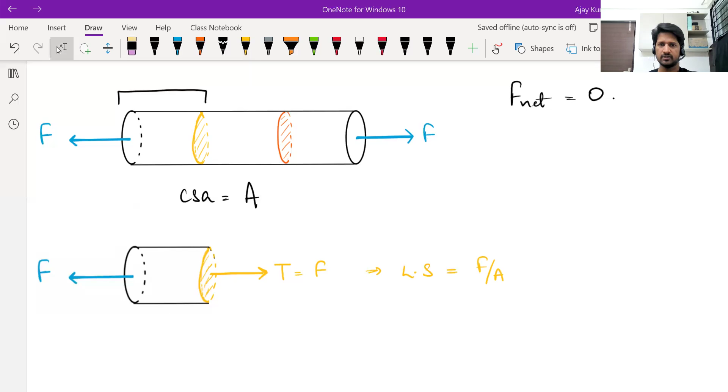So what can I conclude from this? I can conclude that the tension here is equal to F. If the tension there is equal to F, that means the longitudinal stress on that cross section is F by A. It's actually tension by area. Tension is equal to F here, so it is F by A. Next, consider this part of the cylinder, the right side part, extreme right.

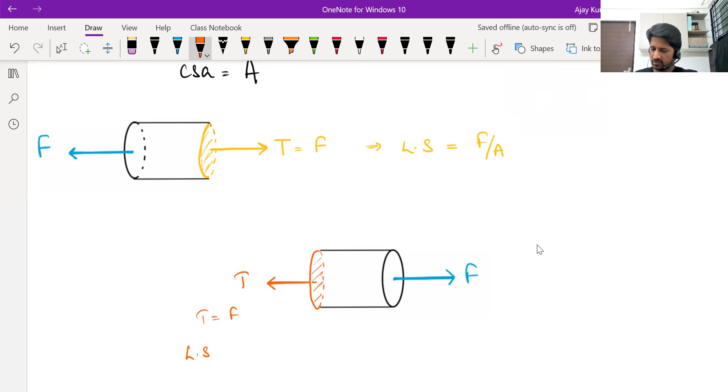What are the forces acting on it? One obvious force is the force F with which we are pulling it. And because the cylinder has a tendency to get stretched, there will be a tension acting on it, perpendicular to that area of cross section this way. The entire cylinder is in equilibrium, so this part will also be in equilibrium. That means tension here is also equal to F. And the longitudinal stress on that cross section is also F by A itself. So this clearly is a case of uniform stress. The stress is same everywhere.

If the stress is same everywhere, here's how you check whether the stress is same everywhere or not. You consider random cross sections. You have to divide the object into two parts, one part on one side of that cross section, another part on the other side.

On any one part, you check the forces acting and write Newton's second law. If you consider this part, the forces acting are the force F we are applying and tension. How do I apply Newton's second law? F net equal to ma. This part is not accelerating, the whole object is not accelerating, so I concluded that T is equal to F.

And if tension is same and area of cross section is same, that means the stress will be same everywhere. So that's how you check whether stress is uniform or non-uniform. In this case, it's uniform stress.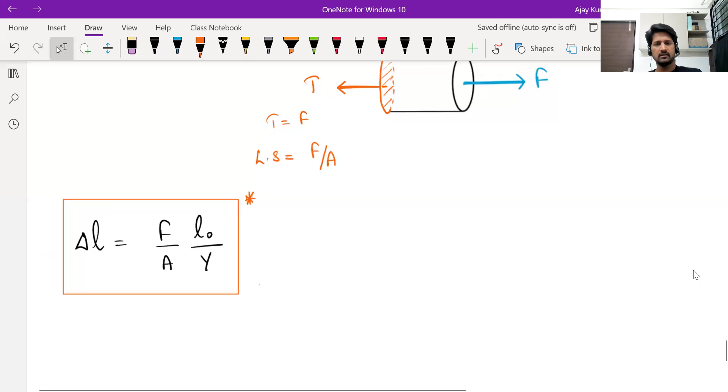Then you can even tell what is the elongation in this cylinder. Initially we said that when we apply forces like this, it will stretch a little bit and then stop stretching. So elongation delta L is equal to the stress, which is uniform everywhere, F by A, into natural length, divided by the Young's modulus. You have to be given the Young's modulus; without that you can't tell how much it will elongate, and they'll give you that in the question. So this was clearly a case of uniform stress, and this is how you express the elongation in this case.

Fine, let's consider another situation now.

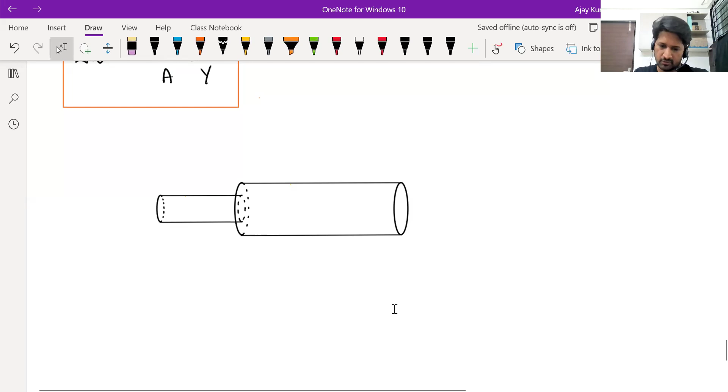Suppose there is a composite wire, meaning a wire made of two different parts, something like this. You can also think of it as a cylinder, like the thing used to roll chapatis, except the handle on the right side is not there. Consider this situation: assume the length here is L, the length here is 2L, the area of cross section here is A, and the area of cross section here is 4A.

And we are applying forces. Let's say a stretching force is applied at both ends of this composite cylinder. This is a solid object and you are applying equal and opposite forces, so the net force is 0. The object as a whole will not be accelerating, and parts of this object also will not be accelerating.

Assume its Young's modulus is given as Y. Young's modulus depends on the material, and the entire object is made of the same material, so let's say the Young's modulus is Y. I want you all to derive the total elongation in this object.

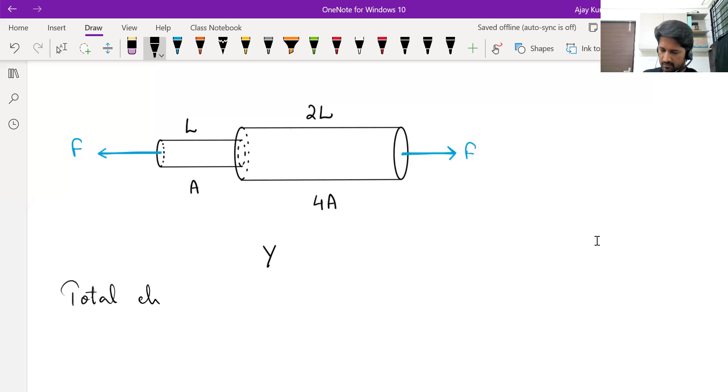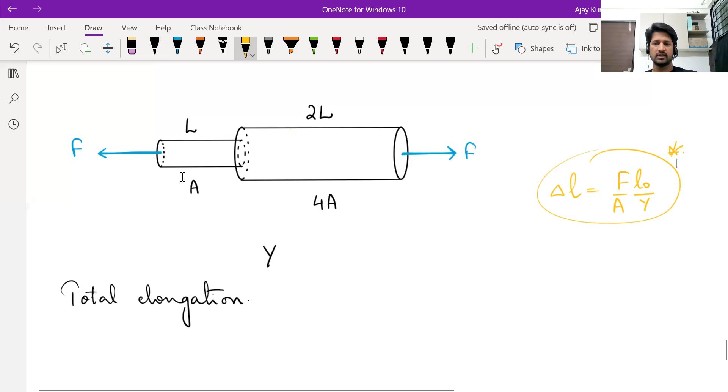What is the formula for elongation? The basic formula is delta L equal to the stress F by A, into L naught, divided by Y. But this is valid only over the regions where the stress is uniform. So think carefully and try to derive the total elongation in this object.

I got one answer as 3FL by 2AY. We'll check. Pawan, can you tell me how you're trying to solve this?

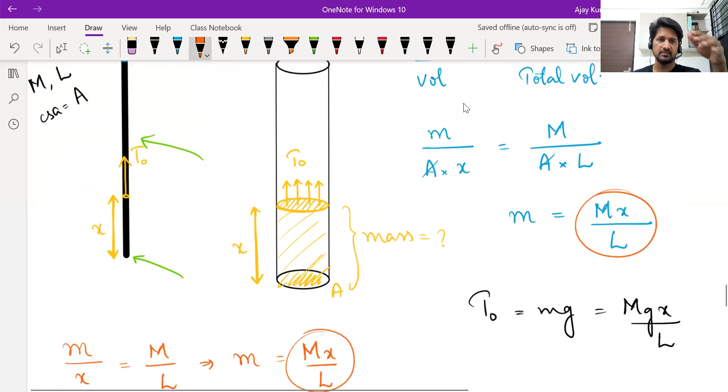Why I'm saying that is we took this case of wire hanging from a ceiling, or we took this case of a block placed on the ground. Block placed on the ground is in equilibrium. Net force is 0, but stress is not same everywhere, because mg acts at every point, while normal force acts at only one point or one surface from outside. Of course, inside there will be normal force everywhere. Anyway, you get the picture. Just because the object is in equilibrium doesn't mean the stress will be same everywhere. Right? In this case, yes.

In the previous example problem that we discussed, and this one that I asked you to solve, in these cases, yes, you get uniform tension everywhere. I'm still not saying uniform stress, but tension is same everywhere. Next thing we need is to know if the stress is same everywhere. Can any of you comment on this? Will the stress be same over the entire object?

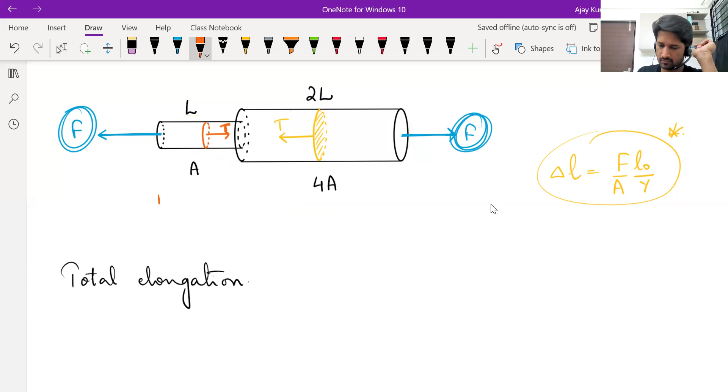No, sir. Definitely not, because the area of cross section is not same. Tension is same everywhere, T is equal to F. But at some places, the cross section is wider, at some places it is narrower.

So the wider part of this object will be under one stress. The stress here will be F by 4A. The narrower part of this object will be under a different amount of stress, that will be F by A. Tension is same at all points, but it does not act on the same area of cross section everywhere. So some part is under greater stress than the remaining part.

So we have identified two separate parts of this system which are under uniform stress. The narrower part has a uniform stress F by A. The wider part has a uniform stress F by 4A. So what we are going to do is separately calculate elongations in each part and add them to get the total elongation in the wire.

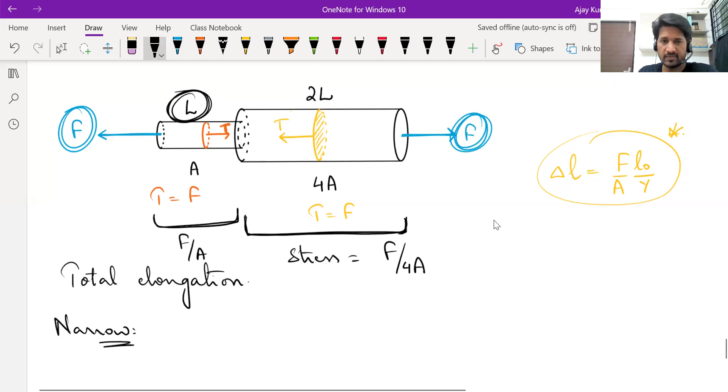That's the logic. So now in the narrower part, the stress is F by A. Natural length of that narrow part is L. Now, some of you may be wondering, sir, it would have elongated, should we take that final length or the initial length? The length when there is no stress is what you call the natural length. That length has to be taken, and that is what is given to you here. So the elongation in that part of the object will be: stress is F by A, natural length is L, divided by Young's modulus.

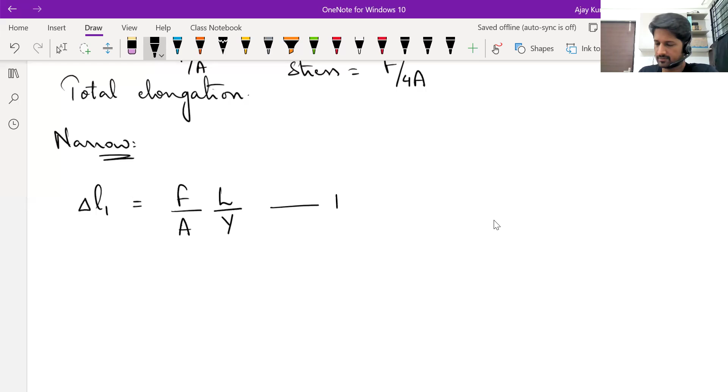Next, in the wider part, the stress is F by 4A. Its natural length is given as 2L, and Young's modulus is Y. Young's modulus depends on the material, and it's the same material throughout. So you can write this as FL by 2AY. This is the second elongation, in the second part. Combine these two, you will get the total elongation: 1 plus 1 by 2, so 3FL by 2AY is the total elongation. Good.

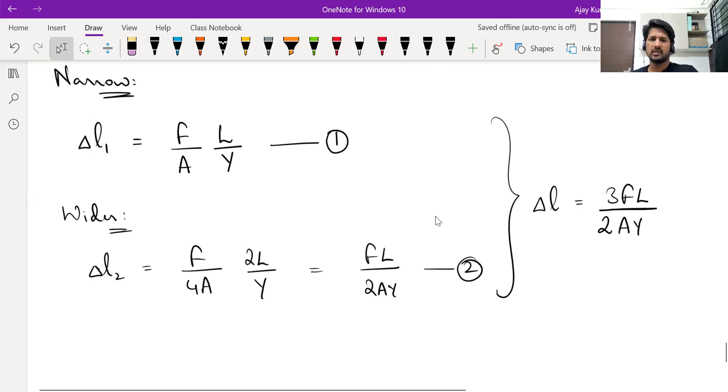So basically I'm just explaining how to calculate stress and based on that, how to tell the total elongation in an object.

Let's quickly go through what all we discussed today. We talked about what are solids, how to deform solids. Solids are not 100% rigid, they can be deformed, and different solids deform to different extents depending on what you do to them also. So basically stress is needed to deform a solid.

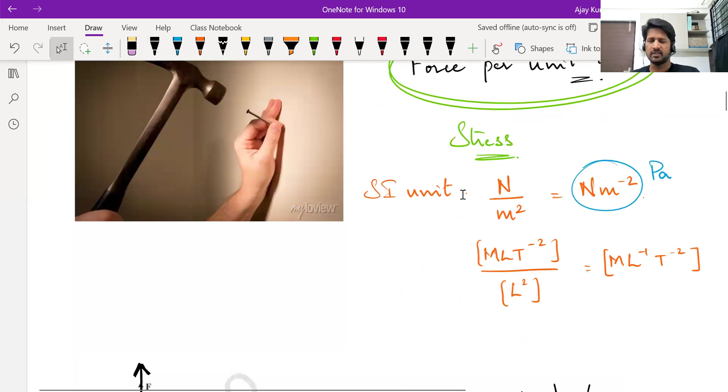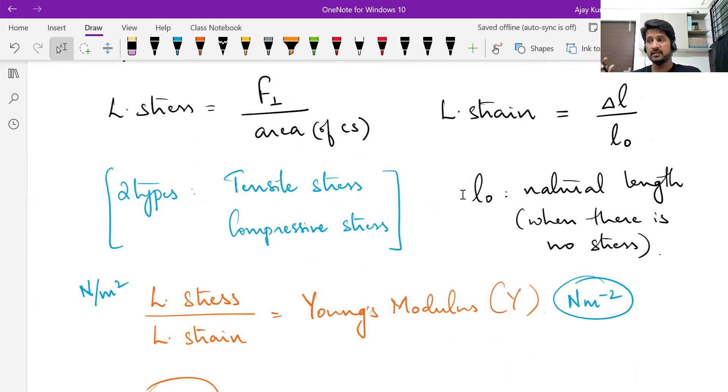Then we define stress as force per unit area. There are different kinds of stresses, 3 of which you will study in your syllabus: first is longitudinal, next tangential, and volumetric. Today's class was mostly about longitudinal stress. Stress produces deformation, deformation is measured in terms of strain, the relative change in shape. Longitudinal stress produces longitudinal strain. Longitudinal stress is perpendicular force per unit area of cross section. The corresponding strain, longitudinal strain, is elongation divided by the original length or natural length. Proportionality constant is Young's modulus.

Now, we don't mean to say that stress will always be proportional to strain or strain will always be proportional to stress, but in case it is, this is how you relate them. Then we did some calculations based on stress, and now we are doing calculations based on elongation produced by a stress.